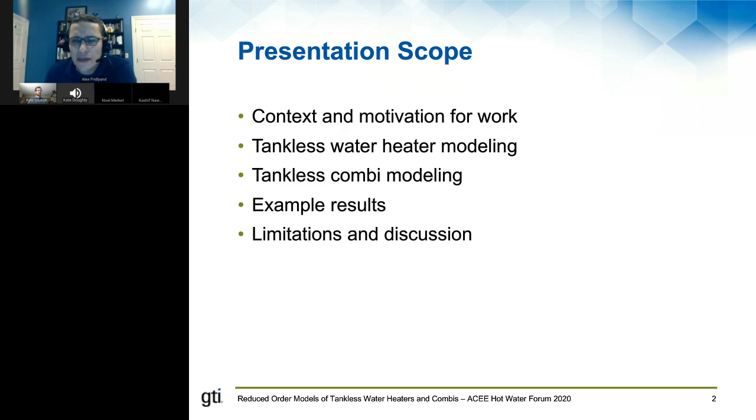This work is essentially a multi-year effort at this point for us at GTI to develop tools for modeling advanced gas residential heating systems. Specifically, we've been focusing on modulating condensing furnaces, gas heat pumps, and combined space and water heating systems. These are either underused or emerging products that, if you want to consider them in your building energy modeling efforts, you'll probably have a hard time finding modules or performance curves that can accurately represent their performance. We've been trying to address that.

We've spoken about this at a few conferences, and there are publications that have been coming out and will continue to come out in the future. For this talk, I'll just be focusing on our efforts regarding combined space and water heating systems.

The goal is to come up with tools that can give you an accurate energy consumption prediction, but do something in a very simple format that can either be used with tools like Energy Plus, or hopefully derive something even simpler for those maybe not familiar with building energy modeling or not well versed in those tools.

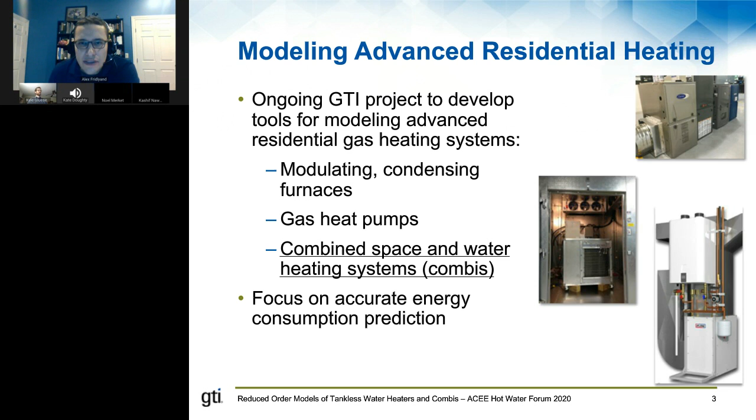For the most part, we work with Energy Plus. There's a number of reasons for that. It's open source, actively developed, widely accepted, and so it's a good focus for looking at the current capabilities for modeling tankless water heaters and combis right now.

If you think about combis in general, and look at what capabilities exist within Energy Plus right now, all of the elements for traditional combis are essentially there. You have your boilers, storage water heaters that you can use as a heating plant. You can have indirectly heated storage tanks. There's actually a talk coming up right after this regarding stratified tank models in Energy Plus. The hydronic air coils, radiant emitters, water-to-water heat exchangers, and solar thermal integration if you want to get a little fancy with your combi systems as well.

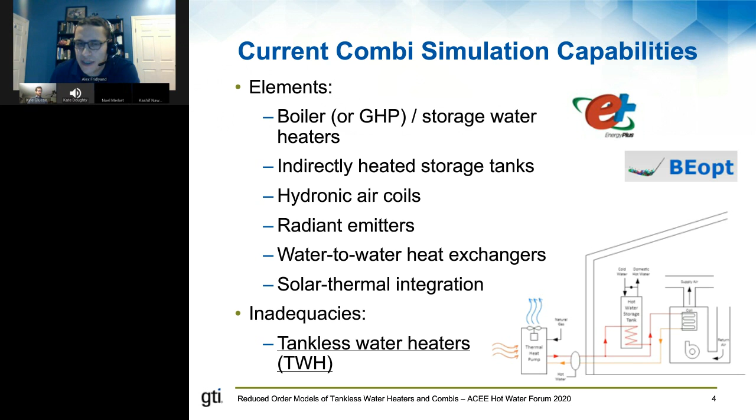However, if you try and go model a tankless combi right now, you'll run up against a limitation pretty quickly, and that's the fact that there is no module for tankless water heaters. The way they're handled in Energy Plus is very simplistic. The current approach is essentially to model it as a storage water heater with a 1 gallon capacity and a constant combustion efficiency equivalent to the energy factor.

This is the approach I've seen used the most. If this is not apparent right away, this is essentially assuming that regardless of your usage cases, regardless of the water heater, your water heater will be performing at the energy factor level. This is your efficiency, your annual efficiency.

Now, there's been a number of studies in the last 15 years, basically laboratory and field demonstrations, showing that the real world performance of water heaters, not just tankless, is a far cry from their energy factors. There was a notable study funded by PG&E, by the Davis Energy Group, that compared tankless water heaters and storage water heaters monitored in the field.

They actually went as far as to recommend an 8% derate for tankless water heaters if you want to get an estimate of annual efficiency. And this is actually the approach that's used with BEopt, at least the last time I checked.

There was another study by Minnesota CEE that did something similar, with a bit more monitoring and a lot more data, but essentially similar conclusions: the actual real world performance falls off quite a bit. That's simply because there's a trend toward using less hot water, and on average you have a lot of days where you don't use a lot of hot water. So your part load losses for both tankless and storage water heaters are pretty significant.

And they actually came up with some simple input-output correlations that you could use for predicting energy consumption that are actually pretty useful, and I just want to make a plug for that as well.

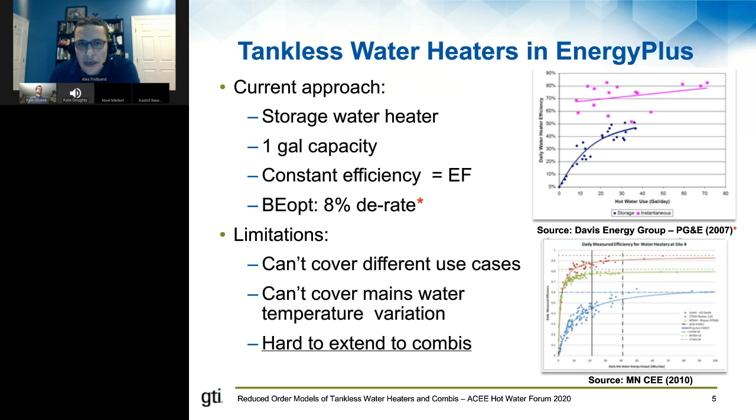So last year, we had an opportunity as part of a NEEA-funded project to get an updated look at tankless water heaters in the lab. There was an experimental component to the study, looking at what are the latest models, investigating some of these claims regarding half-inch gas line capability that you see in some product literature, as well as an energy and cost-saving analysis, which I'll talk about here.

The experimental component and the results there, unfortunately, there's not enough time to talk about, but the final report for that study has been published online by NEEA. So if you're curious, you can follow this link here, and it'll take you to that.

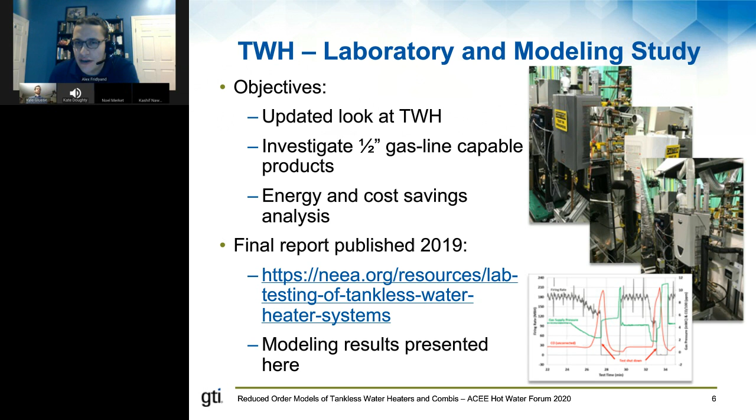So in terms of modeling, we know that we can't really use the energy factor to predict the energy consumption, and it's really difficult then to compare water heaters as well.

So what we did was we applied something called the lumped heat capacity model that was originally proposed by Jay Burch from NREL. There was a report published in 2008 as a more accurate representation of a tankless water heater that's still relatively simple. It's characterized by three parameters: the thermal capacitance C, the steady state efficiency eta, and the standby loss coefficient UA. This is relative to the heat exchanger and water relative to the environment. The thermal capacitance refers to the thermal mass of the heat exchanger and water of the tankless water heaters.

The advantage of this method is that you can do some very simple tests to derive these parameters. For the testing we did for that NEEA project, we tried a test profile where we do 4 draws, 2 different flow rates, and maybe 2-3 hour standby periods. From these draws, you can infer what these parameters are. I highlight at the bottom of the slide what those parameters can look like for a non-condensing tankless water heater.

Since it was proposed in 2008, it's been chewed on in a couple of research studies, but it hasn't been widely used. So this was actually an opportunity to apply it more broadly and see exactly what kind of capabilities there are. And again, we had an opportunity to look at multiple water heaters so we could see how their different parameters compared and come up maybe with a generic characterization.

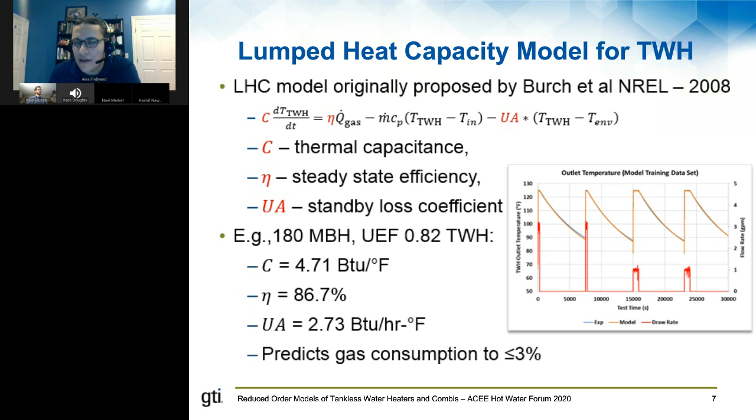Actually, let me go back. So one thing I do want to highlight here is that once we fit the model to the data, we could usually predict gas consumption to within 3% or less, a lot of times less, depending on how reliable the controls of the water heater were. What I mean by that is how reliably it could produce 125-degree Fahrenheit water in short subsequent draws. So we compared it against our UEF measurements, which I wanted to highlight really quickly here.

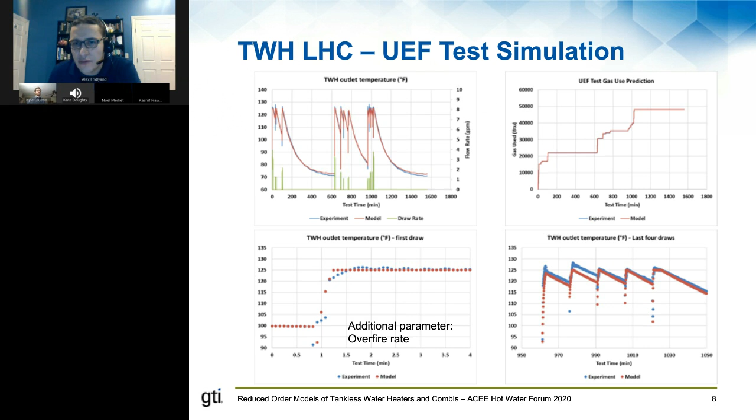If you want to predict the energy consumption for draw profiles that are based on, let's say, gallons versus time steps, you will need an additional parameter we call the overfire rate, but it's essentially just a temperature rise rate. The water heater will at startup fire at maybe 20-30% higher firing rate than it needs for steady state operation, just to bring up the temperature a little bit quickly.

So with that model in hand, we can now couple it with your annual domestic hot water loads. We did it using loads generated by BEopt, Energy Plus, 1 minute time steps, just to get those more realistic draw profiles, and then compare it to a number of different usage cases in a number of different locations - again, Pacific Northwest, but also a number of locations around the United States where the mains water temperature varies, and as a result your actual hot water usage varies as well.

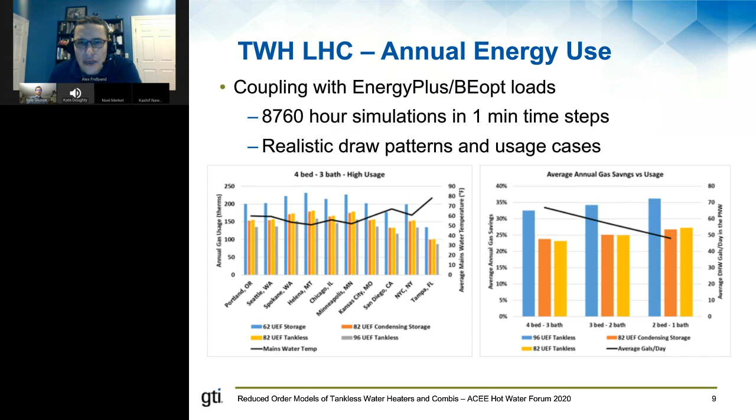The reason for deviations might be because the tankless water heater is a little bit different. Our characterization is based on laboratory evaluation, and the water heaters we've tested have had some combustion system improvements since then. The Minnesota CEE study didn't have as much data in this region on the high daily usage cases.

You're also able to simulate the UEF test, so we wondered whether you could derive this input-output correlation to simplify the process just by running the water heaters through the 4 different UEF draw profiles. We found that's probably not going to work, because for the very low and low draw profiles they're probably not as representative of real-world applications, and you end up with energy factors a little bit higher than what we saw in simulations and what's been observed in the field.

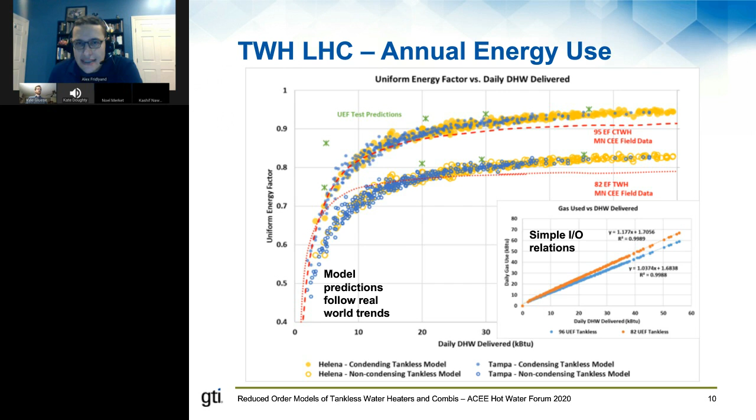So that study is published. The balance of what we've been working on this last year is figuring out how to extend that model towards modeling tankless-based combis.

The reason we want to do that is an ideal model for tankless-based combis is one that would reduce down to just the model for a tankless water heater when there is no space heating calls.

We talked about this a little bit last year, but since then we've tried to expand on it. This slide summarizes the thought process: if we start with the energy balance for the tankless water heater, and add an extra term for heat withdrawn by the air handler, doing the energy balance on the air handler and combining it together, you end up with a combined energy balance equation at the bottom, which now has two extra parameters — the thermal capacitance of the air handler and the standby loss coefficient of the air handler relative to the environment.

It should intuitively make sense, because if you think about what the air handler is and what the tankless water heater is, it's a heat exchanger with some water in it. Ultimately it's on the order of magnitude a similar amount of metal, similar heat loss coefficient, et cetera. So from an intuitive perspective, it should work.

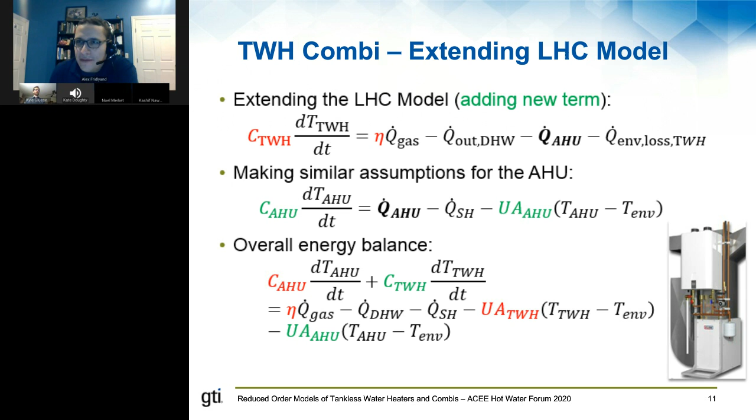The advantage of this is you can, similar to the tankless, potentially infer the parameters from limited testing. In the last couple of years we've been evaluating various combis, as well as something we'll refer to as advanced combis at GTI, where we do simulated use profiles with coincident space heating and water heating loads. If you take that model and fit it to the data to infer those parameters, you can get reasonable agreement with predicted gas consumption on a daily basis.

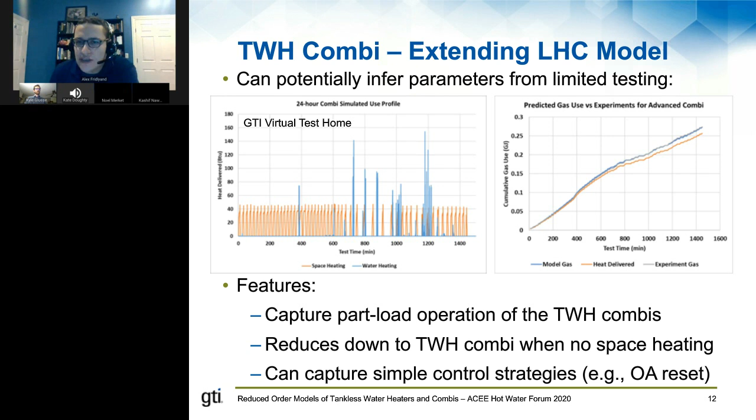The nice advantages are you can capture part load operation of the tankless combis, it reduces down to the model of just the tankless water heaters with no space heating, and you can start playing with controls a little bit as well, like simple things such as outdoor air reset, and strategies to remove the standby loss coefficients. There are limitations as well.

The greatest limitation is you're assuming constant steady state efficiencies for the combustion system. In prior field trials this has not always been the case, and depending on the type of water heater used and whether the system's optimized, your steady state efficiency can definitely drop off. So that may be something that needs to be improved within the model.

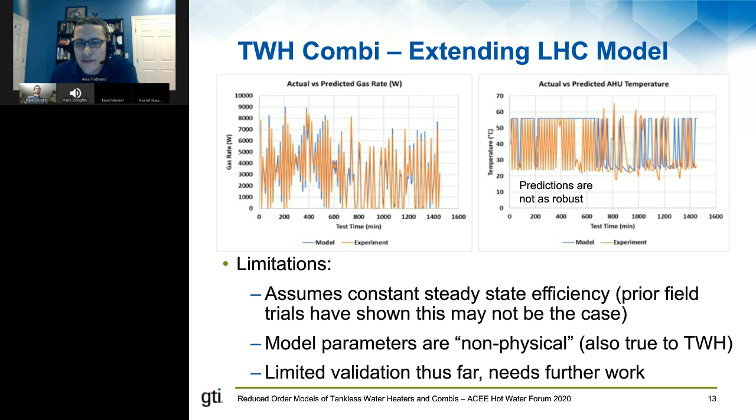One thing I want to note is that the model parameters are really not physical, and this is also true for tankless water heaters. There's not really a whole lot of benefit in comparing the thermal capacitance derived for one tankless water heater with another one — it's more important to just look at their annual energy use as a comparison. We've only had limited validation so far, but for the most part it can capture the trends we've seen in the lab, though certainly more is needed, particularly with more advanced combi systems as well.

I'll highlight a few things regarding control strategies. We looked at the impact of off-cycle heating when you don't have space heating, in an open-loop system where you need to kill Legionella, cycling every 6 hours, which we had to do in one field trial. That's a pretty significant energy penalty, but if you increase the cycle up to 24 hours, a lot of the energy penalty goes away while still potentially taking care of that issue.

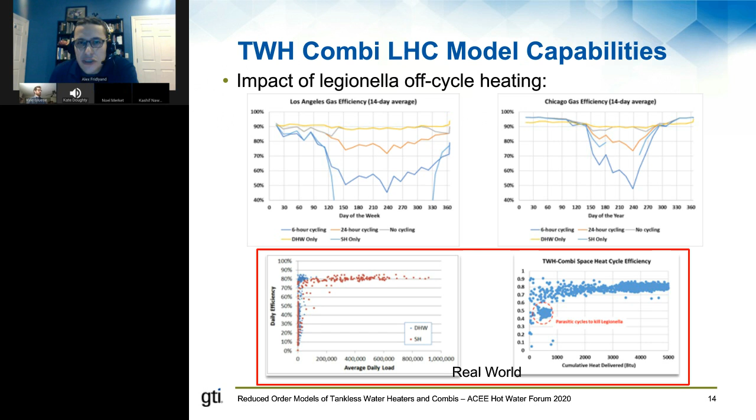What are the broad features of this? It has everything desirable that you want. You can consider it from space heating only, domestic hot water, or combi, and capture the nuances between all three approaches. The combi will give you the highest efficiency because it captures some of the interactive effects between space heating and water heating loads, certainly for colder climates.

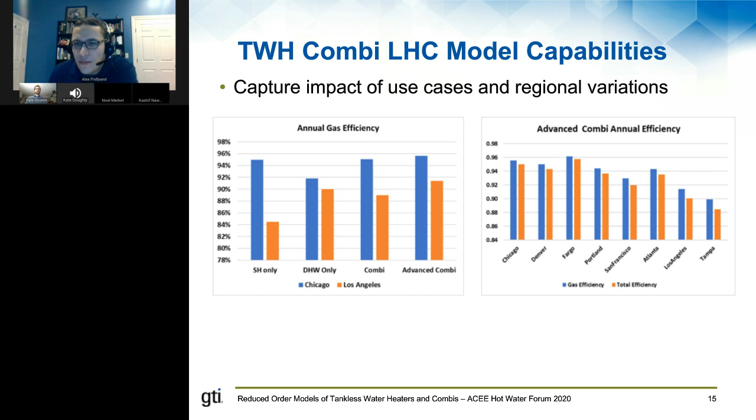We also looked at control optimization, where you reduce some of the standby losses and eke out a little extra performance from your tankless water heaters. With a model like this, you can capture regional variation of the performance as well.

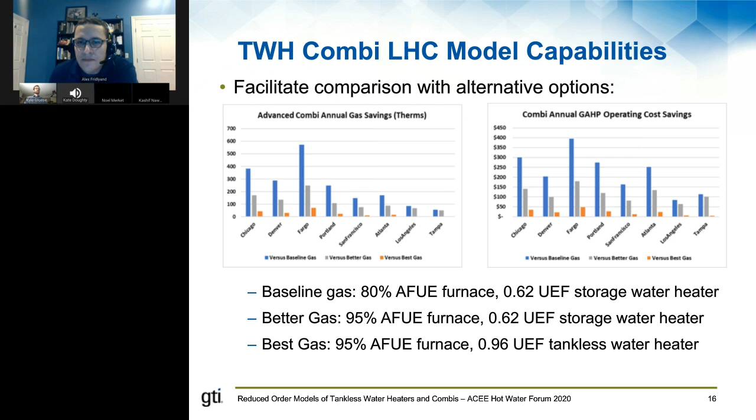The other thing we've used it for is comparison with alternative options. Not counting gas heat pumps, the best combi and gas heating options right now are a condensing furnace and a condensing tankless water heater. With the modeling and testing we've done, if a combi system is properly configured and optimized, you can actually get savings comparable or better than those best gas options. So it's very useful in that regard.

To wrap up, the combi work is still ongoing, so feedback is more than welcome, either right now or as a follow-up. You can reach me directly at the email address there. Definitely further validation is needed—we need to do a lot more uncertainty and sensitivity analysis, certainly with respect to the combi work. There's still a desire to develop some even simpler predictive correlations as well.

To wrap up, I want to acknowledge the sponsors. The tankless work was funded by Northwest Energy Efficiency Alliance, and the combi work is supported by Utilization Technology Development, a consortium of natural gas utilities.

I'll stop there and see, Kyle, if there are any questions I can answer right now.

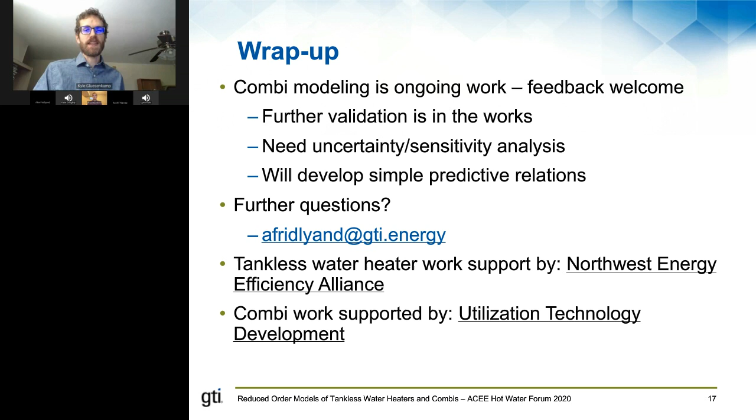Our next speaker is Noel Merket, who will look at improving performance of the stratified tank water heater model in Energy Plus. Noel is a senior research engineer in the residential buildings group of the Buildings and Thermal Systems Center at NREL. His work there has focused on building energy modeling, including making contributions to DOE's Energy Plus software to make it suitable and performant for modeling residential buildings. He leads an industry working group to develop and maintain the Home Performance XML, or HP XML, data transfer standard and supports its adoption. He also leads the high-performance cloud computing and big data analysis capabilities for NREL's ResStock and ComStock building stock models. Noel is a registered professional engineer in the state of Colorado. He has a BS and MS in mechanical engineering from Utah State University. So please go ahead, Noel.

Thank you. You guys can hear me okay? Got everything on? Yeah, I hear you fine. Great, wonderful.

So yeah, I wanted to talk to you guys a bit today about some work we did to improve the stratified tank model in Energy Plus. And the first thing to talk about is there are several kinds of tank modeling, water heater modeling for storage tanks available, and several ways to do this. There's kind of a complexity spectrum.

There's everything from just assuming it's all mixed, and that model is available in Energy Plus, all the way on the other end of the spectrum to CFD, which, if you want to understand very detailed dynamics of how different heat exchangers are working and everything, that's the way to go. Kind of in the middle, or even more on the simple side, is the stratified tank model.

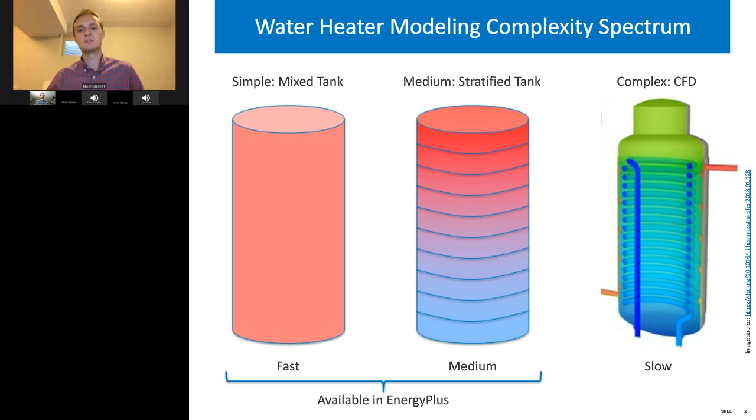So why would we choose the stratified tank? It's fast enough to be used in a whole building simulation. It can handle that stratification, and it's kind of that just-right balance of accuracy and speed. Specifically for us, one of the motivating factors was we wanted to model heat pump water heaters, where the coil is in one location in the tank, adding heat lower, and there's heating elements at different elevations in the tank. So it's necessary to accurately get the delivered hot water correct and the energy use correct for heat pump water heaters.

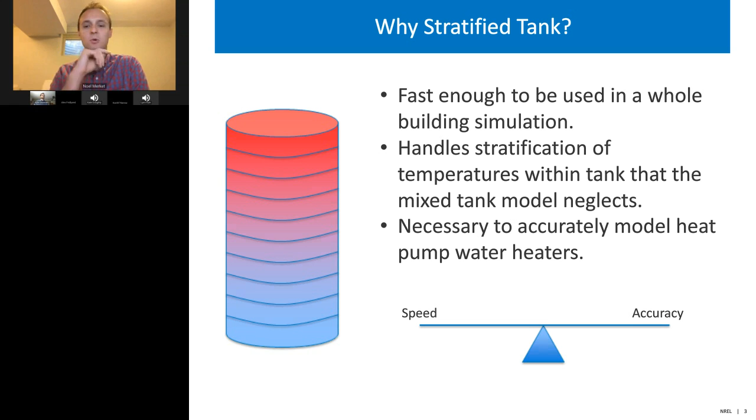So why does this matter? We're doing this in the context of Energy Plus, which is DOE's flagship building energy modeling software. It's being used in both residential and commercial buildings, with more of a focus on commercial buildings initially, and we've been working to make it work better for residential buildings. For residential buildings, Energy Plus can sometimes take too long to run.

In cases where you're at the kitchen table trying to talk to somebody and propose some updates they can do to their home, we don't have 10 minutes, 20 minutes to wait for a simulation to run. So the faster it can run, the better. The slowness in the case of Energy Plus and the stratified tank model was making it so that third parties weren't willing to pick up using Energy Plus and to recommend and use heat pump water heaters.

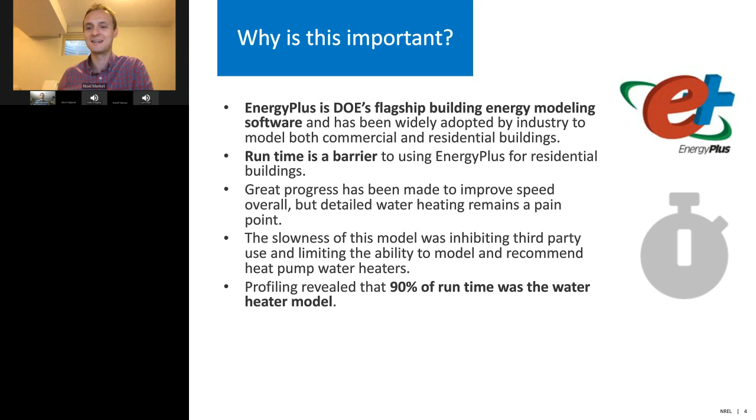So we started looking into why, and we realized that for models with a stratified tank in it, over 90% of our runtime was just the water heater model, and the entire rest of the building was the other 10% of the time. So it seemed like the place to dig in. The first thing is to understand, well, why is it being slow?

So diving down into the math of it, we're calculating the temperature in the tank, which means solving this differential equation: the mass of the water for that node in the tank, each of those slices, the specific heat, change in temperature over change in time, and the heat being added or removed from that node, whether through flows in, flows out, standby losses, heat being added from the coil or the heating element or burner.

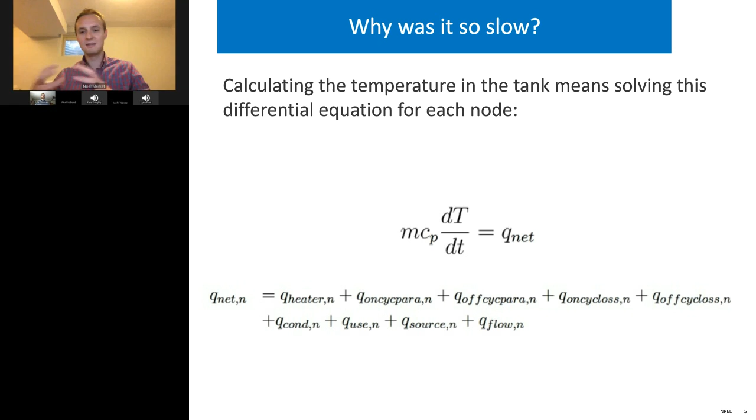So that's the net of all the heat gains and losses on that node. The way the Energy Plus model used to work is kind of like numerical methods 101: we take the forward Euler method and march forward in time, changing that differential equation into discretized steps.

The problem is that to have it be accurate, we had to take really small time steps of 1 second. Energy Plus itself has a larger system time step, usually from an hour to a minute. So within that system time step, we were having to take at least 60 steps, and possibly many times more. It was taking a long time — we had to reevaluate all the heat rates and everything in the tank that many times for each system time step in Energy Plus.

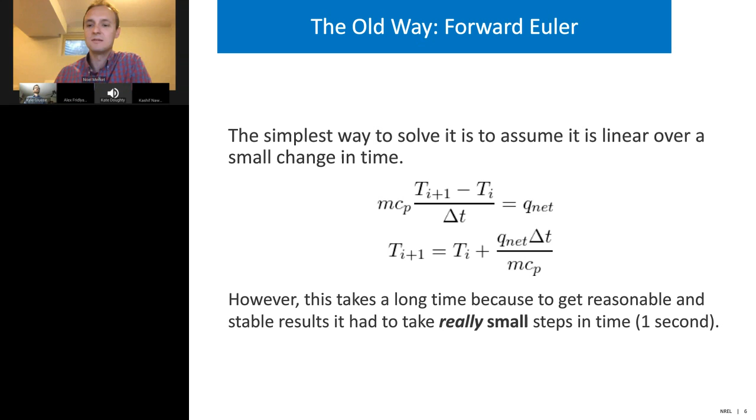So we went to the drawing board and thought, how can we make this work better? This was using a pretty rudimentary numerical method — are there other approaches that would work better? We looked into a lot of different approaches for modeling tanks, specifically how to do better with the stratified tank, but we were open to a lot of things. We did some literature review and talked to a bunch of people.

Eventually we got in touch with the folks at TESS, who had been developing models for Trnsys, and we were really impressed with the approach they took for their Type 534 stratified tank model — the numerical approach they used there. So we worked with Jeff Thornton, subcontracting with him to get his knowledge and expertise on how to apply that within Energy Plus.

The new approach, the secret sauce here, is that taking that previous differential equation, we could rearrange it into a form with generic coefficients. You separate all the terms in that heat rate, the Q net, into parts multiplied by the current tank or node temperature — the A term — and everything else, the B term. That's anything involving adjacent node temperatures using the previous time step, ambient temperatures, and similar terms falling into that B term.

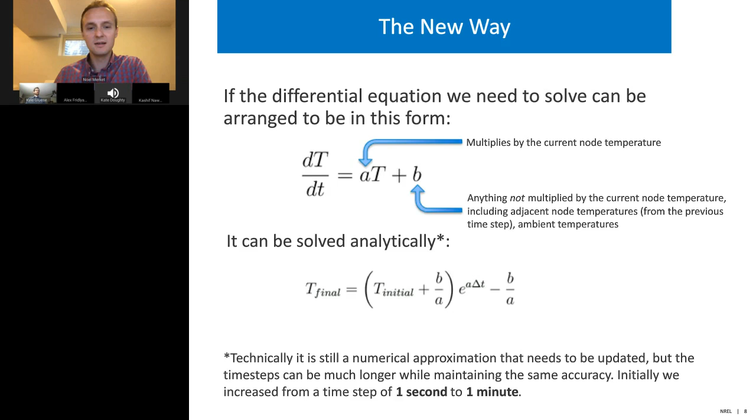The next thing we did on top of taking larger time steps was ask: would it be possible to take even bigger time steps when interesting things aren't happening in the tank — when it's just sitting there for several hours in the middle of the night with no hot water draws, just mostly standby losses? Or to take smaller time steps for better temporal resolution and more updates when things are happening, like large draws or active heating.

To do that, we have to recalculate those A and B terms, which is a fairly expensive operation. The way we did it was based on the current heat rates — it depends on everything happening, but a lot of them are changing slowly enough that we can take a bigger time step.

So what we did was calculate how much the temperature of each node could change before something interesting happens, like hitting a set point and the heater kicking on. Then we make a rough linear approximation, going back to that previous differential equation and rearranging it to figure out how big a time step we can take until we reach that point of something interesting happening. In reality, in the code, we actually back off a little bit — we don't go all the way to that point.

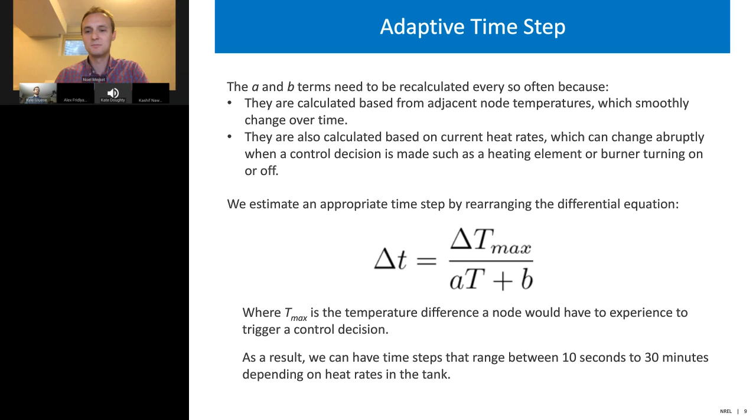That allowed us to gain even more speed improvements, because for most of the time in an annual simulation, there's not a lot happening with the tank. It's just kind of sitting there losing heat slowly through the walls, which doesn't take a whole lot of computation to get right. So at the end of the day, the question is, how much faster is it?

Originally our models were running on the order of 2 minutes, which was a little too slow for some of the residential buildings we were working with. We wanted them to get answers much quicker. By reformulating, we got that down to about 30 seconds, and then with the adaptive step size, that cut it in half again to about 15 seconds. This is for a whole building simulation, 10-minute time steps, for a single-family detached residential building with a heat pump water heater, which kind of seemed to exercise this the most.

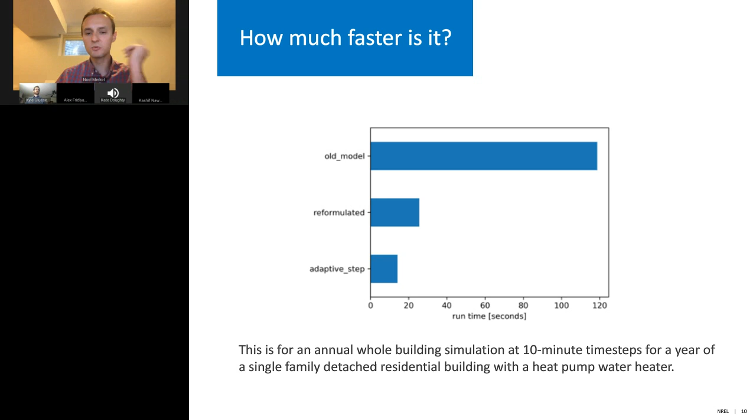That was a really good outcome for us, because that meant that heat pump water heaters could be used in some of these models, and we could recommend them and understand their energy use while not being held back by waiting for the simulation to run. So the other question is, does it come up with the same answer?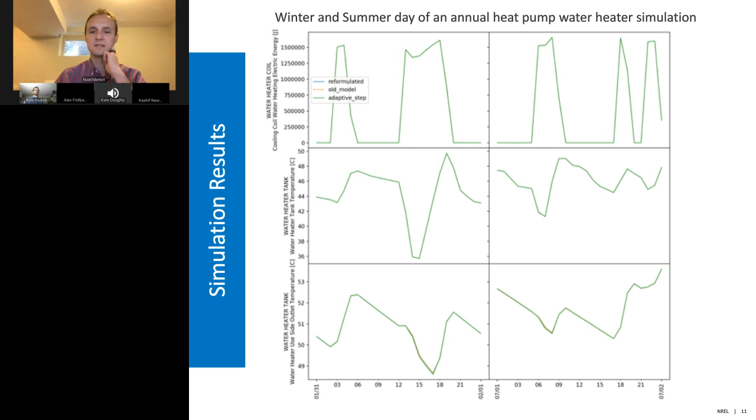So that is the end of my presentation, and happy to take questions.

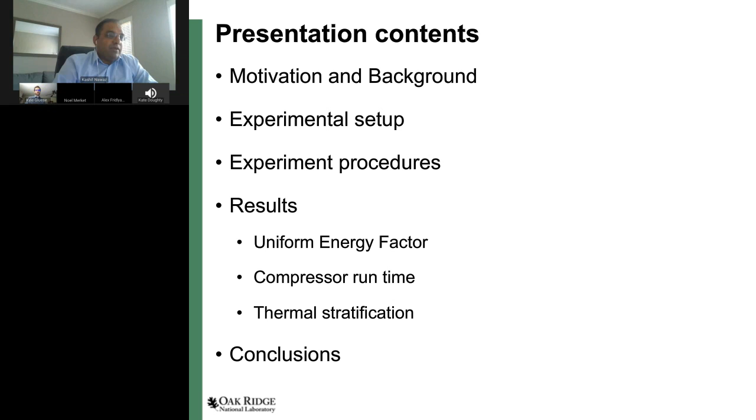So by far, heat pump water heaters have been found to be one of the most efficient technologies. Water heating itself is important because about 10% of all energy used by buildings is for water heating. When we look at different water heating technologies, heat pump water heaters might have a higher upfront cost, but when you look at the payback period, it's much lower compared to some competitive technologies.

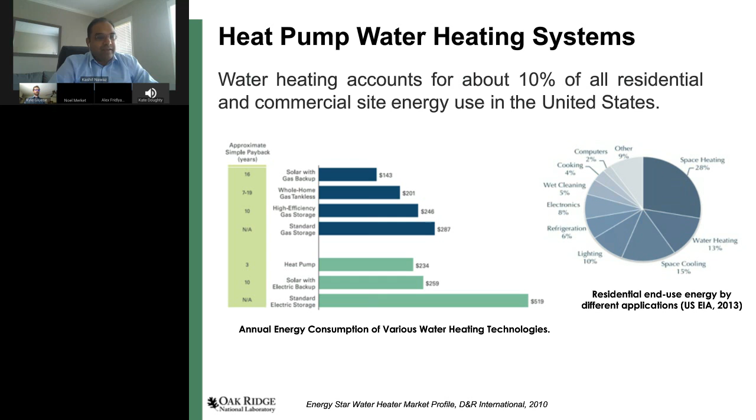The heat pump water heater itself is essentially a heat pump used to heat up water. But when you look at the different components, it's a more involved and highly complex system because unlike the conventional air source heat pump, you also have to deal with the storage tank and an appropriate control system. Oftentimes the heat pump system is backed up by electric resistance heaters, which complement it whenever there's a sudden increase in demand. So all in all, it becomes a very complicated system.

On top of that, when you are operating it under extremely low ambient temperatures, there is a probability of a lot of things happening on the evaporator coil, meaning you can have a lot of condensation and frost formation, which can lead to degradation of the performance of a standard unit.

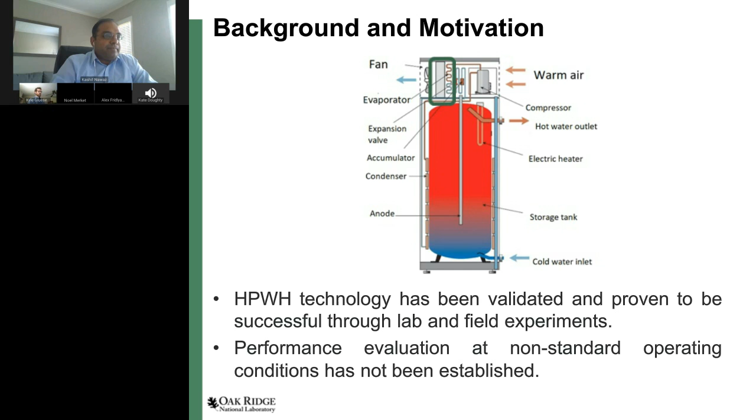What happens essentially at the lower end, in cold climates, is there's a higher probability of frost growth on the evaporator, on the outdoor coil, and that can lead to a reduction of capacity as well as increased fan power, which can result in lower performance.

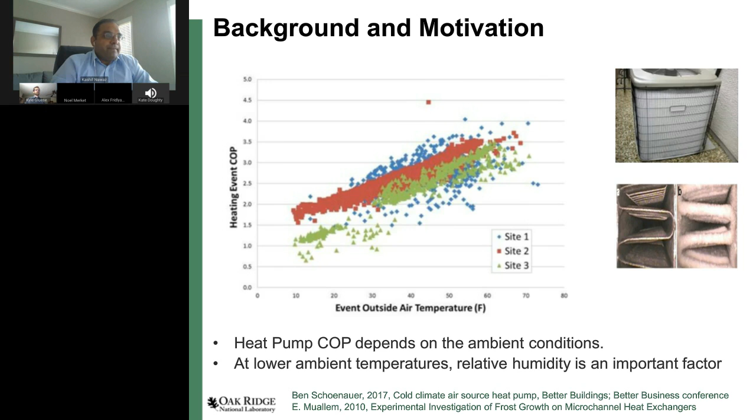When we talk about heat pump water heaters, they are normally placed in areas where the temperature stays higher, but there can be situations where the temperature can go low, to a point where we can start seeing phenomena such as condensation on the evaporator coil, which degrades the performance. Worst case, if the temperature is really very low, we can see frost formation, which decreases the performance even further.

Along with these two aspects, there is also going to be substantial heat loss. Existing systems come with very good thermal insulation, but when you decrease the ambient temperature, there can be implications. Beyond these conventional aspects, because of the emerging interest in some flammable refrigerants, there is a possibility to put these units outside of homes, where they will have to go through the same issues seen by air source heat pumps.

I also want to highlight that UEF and COP, Uniform Energy Factor and COP, are two different parameters. If you just look at COP, that's a good measure of steady state performance, but UEF also gives you an idea of how much heat loss there is from the tank. So effectively, UEF is a better parameter to quantify the performance.

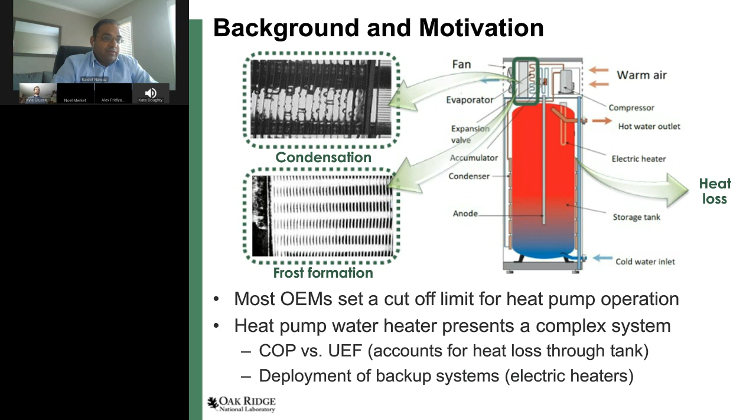I want to highlight that most of the results we are presenting, or all of the results in the following slides, are essentially based on the performance of the heat pump. We made sure that the electric heater does not participate.

On the refrigerant side, we were monitoring the suction and discharge temperatures and the flow rates of the refrigerant. On the water side, we were able to control and measure the inlet-outlet temperature and water flow rate. We also had a thermocouple grid inside the tank to monitor the temperature or thermal stratification at different conditions. And as I mentioned earlier, we had control of the ambient conditions by controlling the dry bulb and wet bulb temperature.

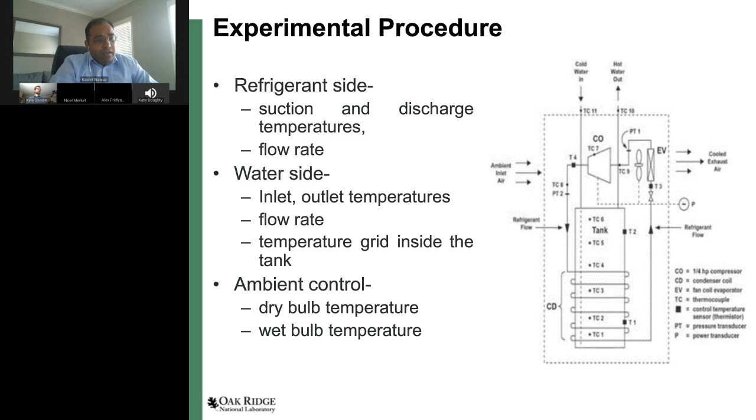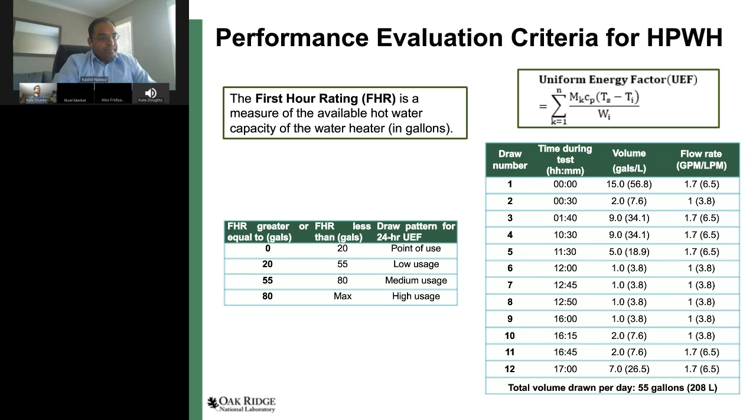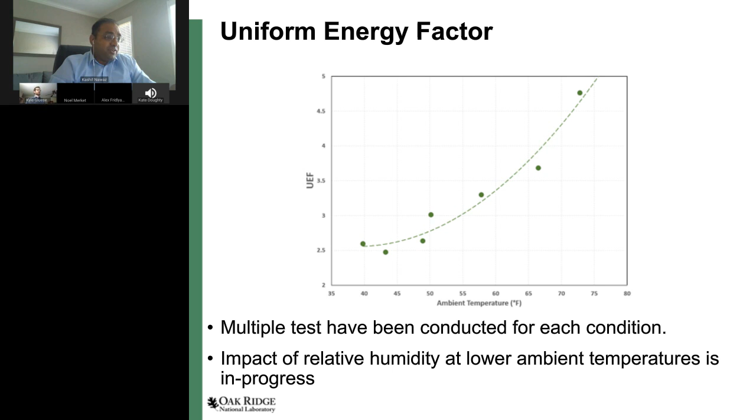I want to mention that this study was mainly focused on the ambient dry bulb temperatures. We were monitoring the relative humidity, but that was not the main focus. We are actually conducting another set of experiments to see what happens with respect to relative humidity when operating at lower ambient temperature. In that case, we are mainly focusing on temperatures below 45 degrees F, because above that, the relative humidity is not that critical. We might see a little bit of condensation, but the problem will be much more interesting if we are operating at the lower side.

So the UEF is established based on the total energy input. The 24-hour test accounts for the total energy input into the system. One of the important parameters is really the compressor runtime, because that directly relates to the amount of energy which has gone into the system.

So we have run a series of experiments. There's actually a similar pattern. There are some outliers, and we are essentially in the process of confirming that data.

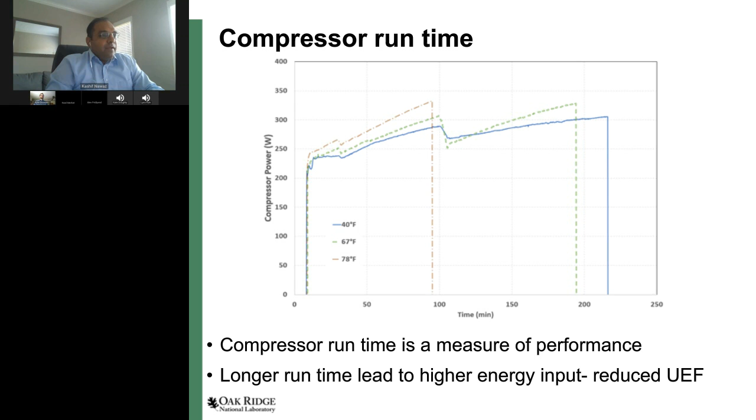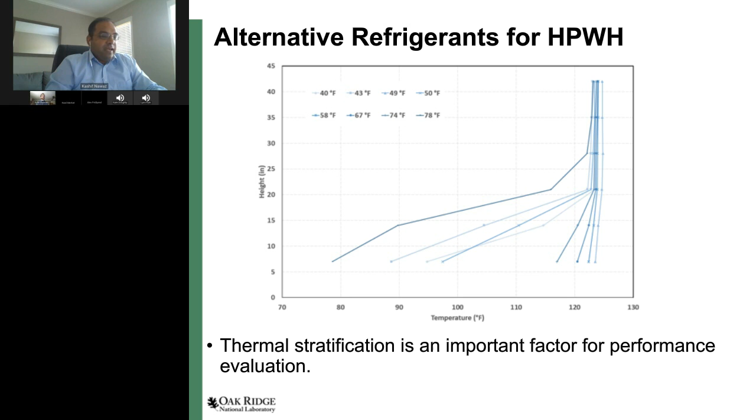This is just one set of experimental data which I'm showing, but we have essentially analyzed the thermal stratification at different situations, such as during the draw time, right after the draw time draw pattern, and when the system has been on standby mode for a couple of hours.

Moving on towards the conclusions, we have established that the ambient conditions are important. They can impact the performance of the heat pump water heater. Uniform energy factor and COP, both of them degrade because of the ambient temperature as we go towards the lower end. The compressor runtime is an important parameter which must be accounted for when looking at the overall performance.

And most importantly, the thermal stratification behavior is significantly different when we look at the different ambient scenarios, and that obviously can lead to change in the performance.